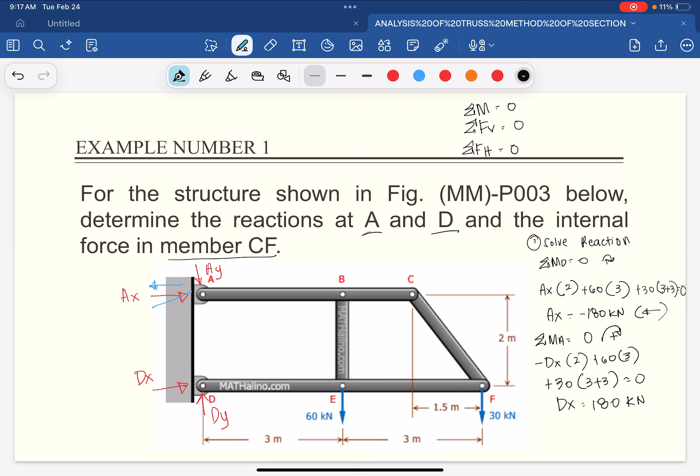Okay, so let's project everything here. We have AX at 180 kilonewton and then DX at 180 kilonewton.

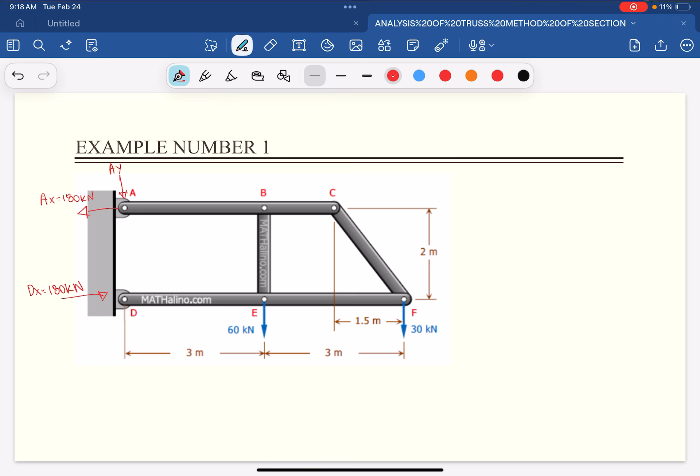But then, as we said, we need to consider the 3-force member first. Therefore, let's try using or considering our ABC, this part here. Okay, so to see the isolation, let's just draw it.

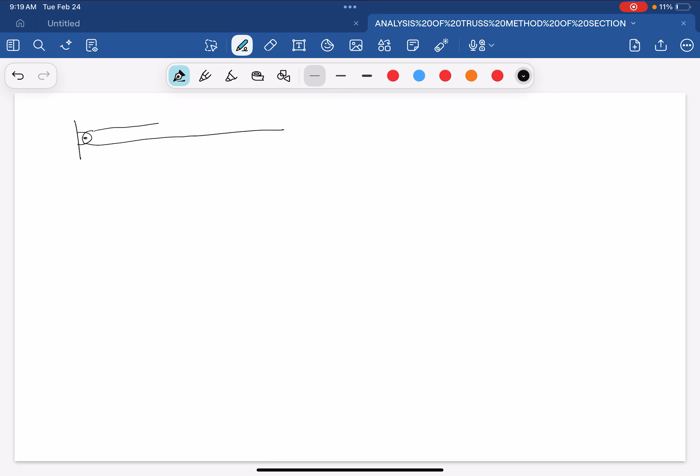Okay, so if we draw this, we have the support here. And then the long structure. We have A here, we have B here, and then we have C here.

Now, the reaction again at our AX is 180 kilonewton and our AY is still unknown, and the B and C. So at our B and C, since they're already internal, that's where we'll have our internal forces. So at our B, what forces act at point B? We have an upward force acting here.

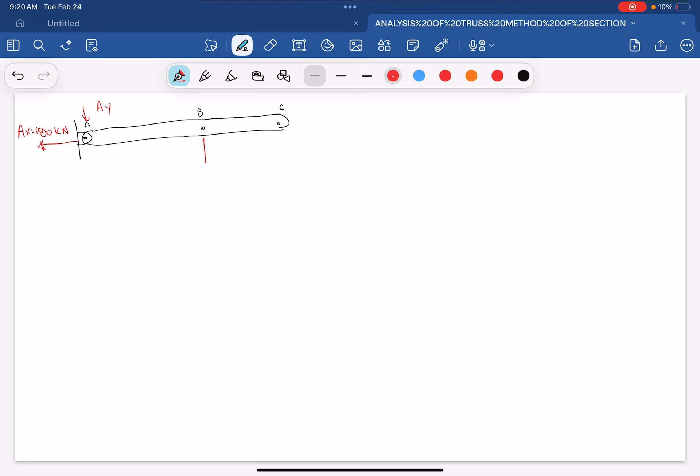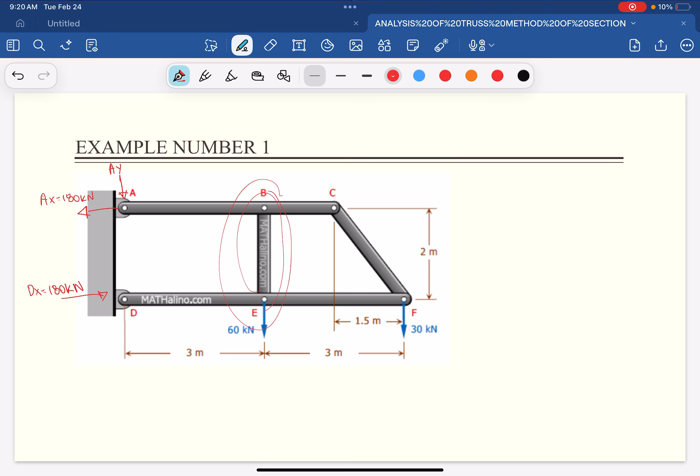Okay, so pwede natin i-consider yun na FBE. Kasi meron member na nakadikit kay B. Ngayon, ano ba yung nag-act na reaction kay BE? Pwede nating i-consider na merong nag-act na upward forces kay BE.

Ngayon, kay C naman, ano yung nag-act na internal forces? Since meron pong nakadikit na incline member kay CF, ang kinoconsider natin is tension or away sa joint. Since kay point C, we have the force CF. Imagine nyo lang na method of section, pero hindi nyo na pinoproject yung cutting. Parang talagang frame lang o yung isang member lang talaga yung kino-consider natin.

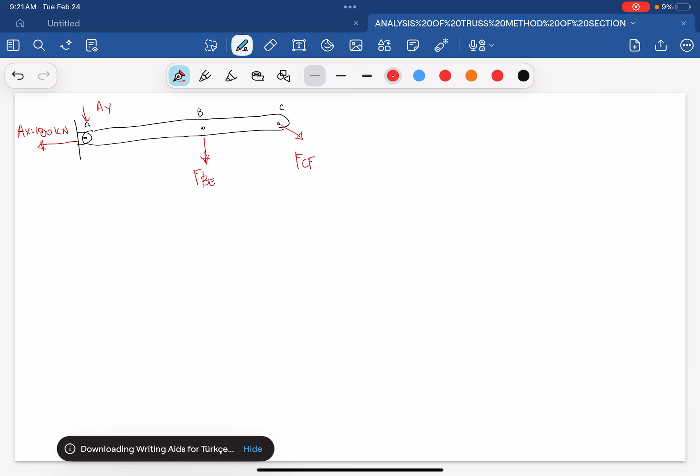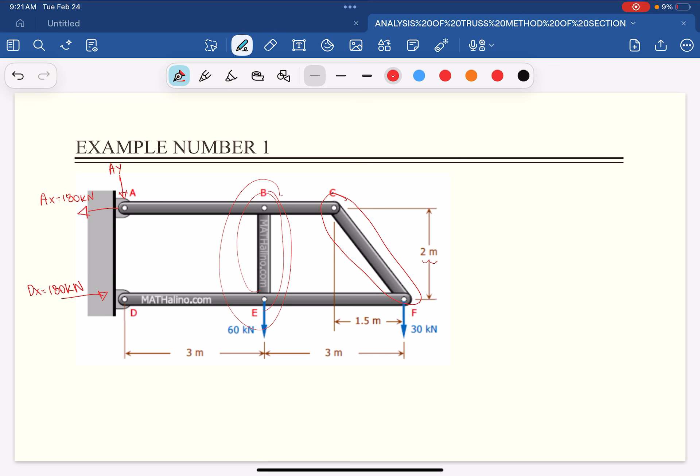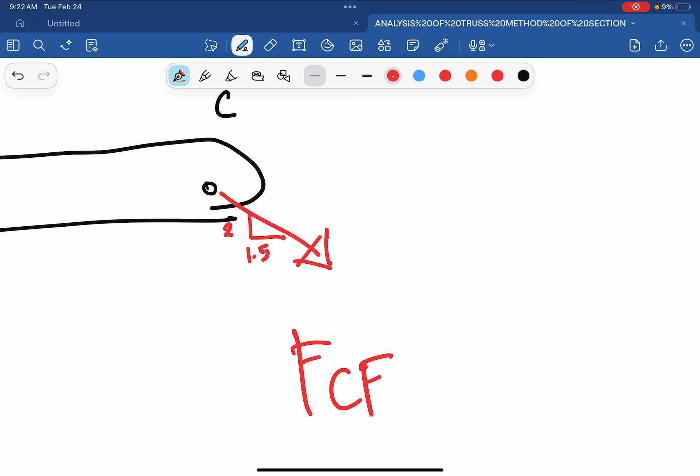Ngayon, since meron tayong incline dito sa part na to, ano yung magiging slope o distance nung ating incline? I-consider natin yung dimension: meron tayong vertical na 2 meters, tapos horizontal distance na 1.5 meters. I-project natin sa vertical 2 at sa horizontal 1.5. Kung i-compute natin gamit ang Pythagorean, 2 squared plus 1.5 squared, we have 2.5 yung pinaka-slope.

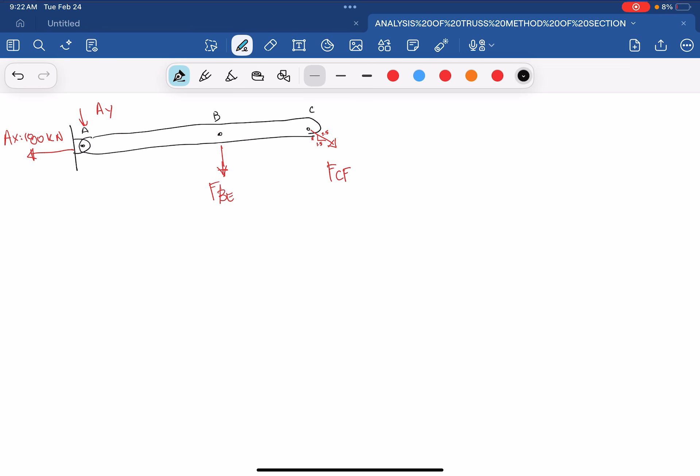Na-identify na natin, pwede na tayong mag-proceed sa equation. Ano ba yung equilibrium formula na pwede nating gamitin na iisa lang yung unknown? We have summation moment B is equals to... Kung naaalala ninyo yung tatlong equilibrium equations - summation forces horizontal, summation forces vertical, at summation moment - alin dito ang iisa lang ang unknown na lalabas? Hindi po ba we have summation forces horizontal? Kasi kung vertical, we have 1, 2, and 3 unknowns. Kung moment naman, magiging 2 unknowns pa din depende kung saan tayo magmo-moment. So let's just use the summation forces horizontal.

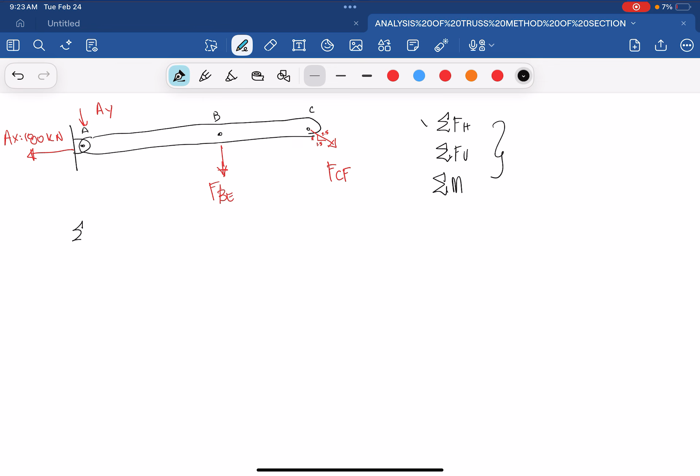To the right is positive. Ano ba yung ating horizontal forces? We have negative 180 plus yung force CF times slope na 1.5 over 2.5, equals 0. Therefore, ang CF natin, using our calculator: FCF times 1.5 over 2.5 minus 180 equals 0, shift solve. Ang ating FCF is 300 kilonewton.

Meron na tayong value ni FCF, which is isa din sa hinahanap. Pwede na natin gamitin yung isa pang equilibrium of moment. Bakit equilibrium of moment? Kasi pag nag-summation forces vertical tayo, dalawa pa din yung unknown na nawawala. Let's try summation moment at B is equals to 0. Pero pwede rin naman mag-moment kay A o kay C. Hindi pala tayo pwede mag-moment kay C kasi dalawa yung unknown, so it's either B o A lang para may isang unknown na makakancel.

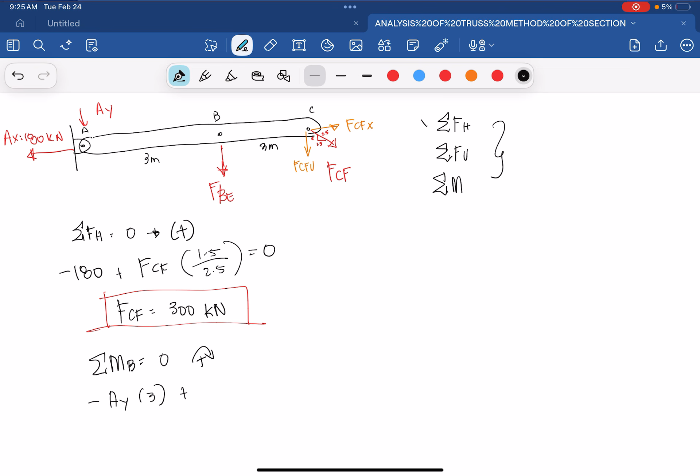Since mag-moment tayo kay B, meron tayong 3 meter and 3 meter. Iikot lang si AY: negative AY times 3. Tapos yung FCF, i-project natin dito na meron tayong vertical FCFV at FCFX. Yung FCFV lang ang i-consider natin, iikot siya kay B, which is positive. Ano yung value ni FCF? We have 300 times distance na 3 is equals to 0. Ang ating AY is negative X times 3 plus 300 times 3 is equals to 0, shift solve lang po. Ang ating AY is 300 kilonewton din po.

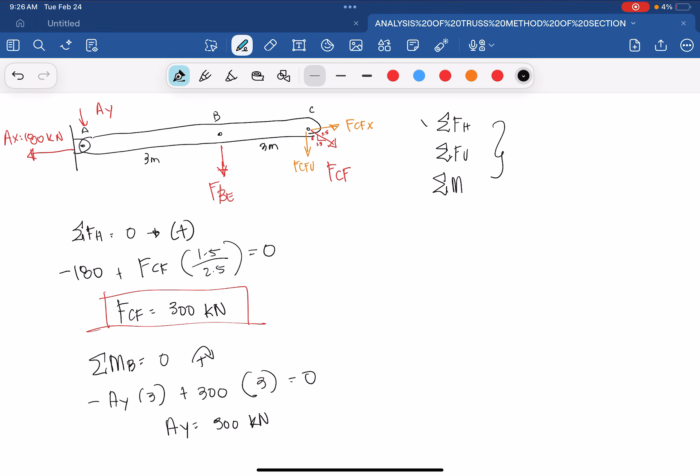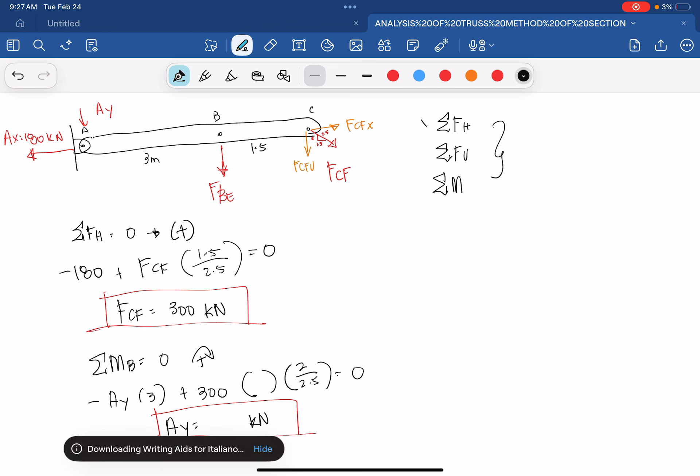Oops, I'm sorry, hindi po pala siya 300 kilonewton. Nakalimutan po natin yung slope nung ating vertical forces. We have yung vertical slope niya na 2 over 2.5 is equals to 0. Ulitin lang po natin yung computation natin: AY times 3 negative, iikot, plus positive 300 times 1.5 - hindi po pala 3 yung distance.

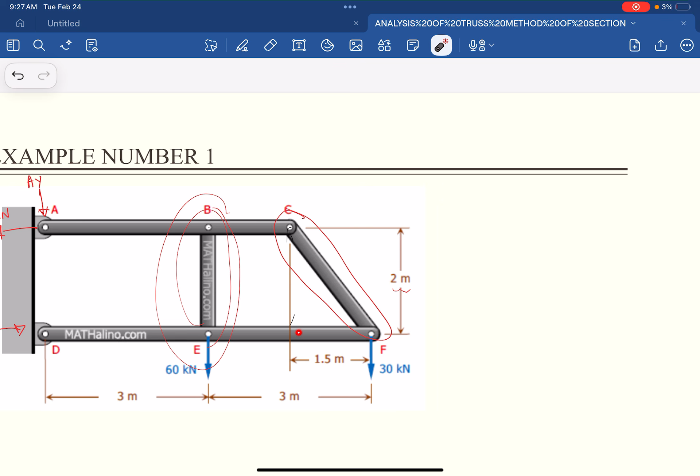We have 120 kilonewton, double check nga po natin. So mula kay B at C, kung makikita nyo po dito, meron po tayo kasing 1.5 dito, and yung naiiwan, 3 minus 1.5, we still have 1.5 from B to C. Since nagamit na natin si summation moment, naiiwan na lang po yung summation forces vertical, at wala naman na pong problem na gamitin dahil iisa na lang yung natitirang unknown.

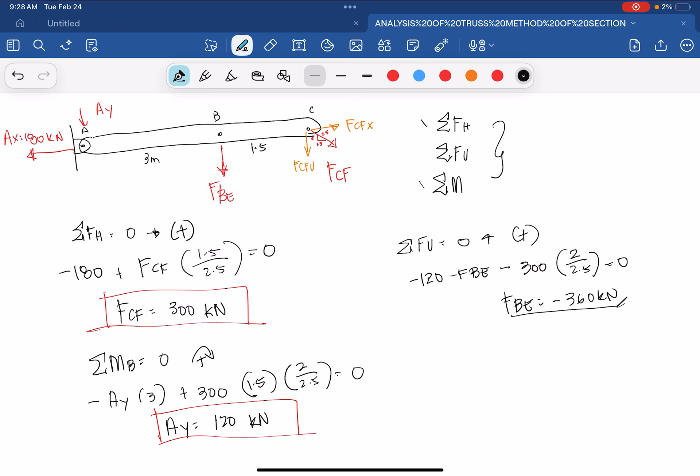So, AY is negative 120 minus FBE minus FCFV na 300 times yung slope niya. Wag po natin ulit kakalimutan. Ano na ulit ang value ng FBE? We have negative 120 minus alpha x plus minus 300, 2 over 2.5 equals 0. Shift solve, ang value ni FBE is negative 360 kilonewton. Pero hindi naman din po siya hinahanap, so hindi na rin naman po siya kailangan isolve. Pinakita lang po natin just for you to understand.

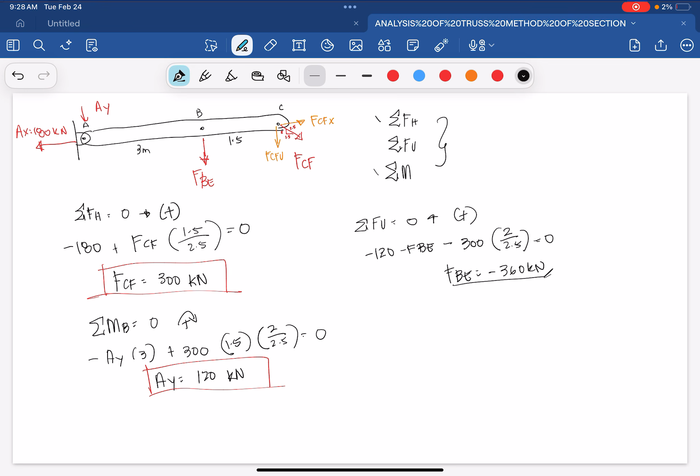Since meron na po tayong value ni AY, balikan natin yung naiiwan na value o unknown sa ating letter D. Assume na yung reaction niya, vertical reaction, is upward. Therefore, let's use summation forces vertical dahil wala naman na pong naiiwang unknowns. Meron po tayo ditong dV na positive minus AY na 120 kilonewton, minus 60 minus 30 is equals to 0. Therefore ang value ng dV natin is 210 kilonewton. Napalabas natin lahat ng mga value natin.

Ayun, let's continue discussing next example problem. Let's just refresh yung steps sa ating second problem. I hope you understand kung paano natin sinolve yung process in computing o using the analysis of frames na method of members.